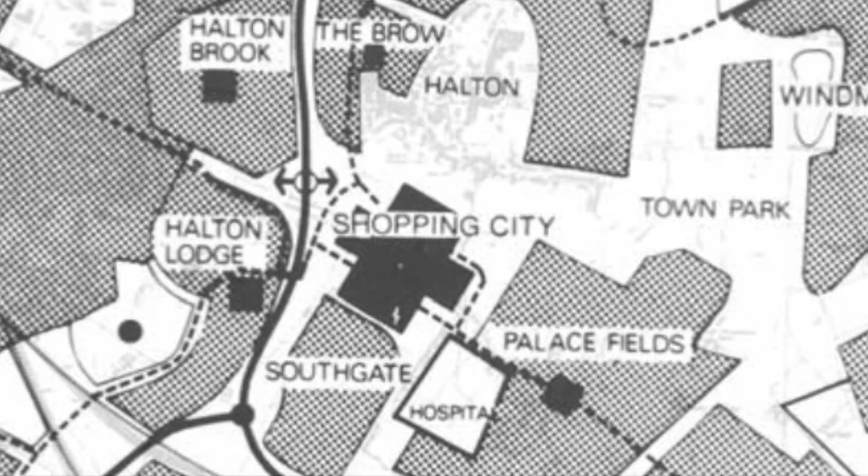Runcorn Shopping City was the solution to the need of establishing a complete town centre for Runcorn's new town. The resulting complex of buildings was the result of months and months of planning, designing and engineering. This continuous process lasted right into the middle of its construction and would accumulate a number of other agencies and investors to make it a reality.

If you haven't watched part 1 of this series, it would be useful to understand the underlying situation of Runcorn Newtown from 1964 when it was first designated to 1968 when construction was underway. In this video, we'll look at the very long, very sophisticated planning of Runcorn's shopping city.

Runcorn Development Corporation's town centre team consisted of many disciplines and talented people who were incredibly forward-thinking, well-read and ambitious in their desire to not only meet requirements but attempt to provide a new world solution to make quality of life better using the most advanced technology and pioneering construction techniques of the day. Arthur Ling was the producer of Runcorn's master plan, but an entire team of people dedicated to the town centre are responsible for the design of Shopping City.

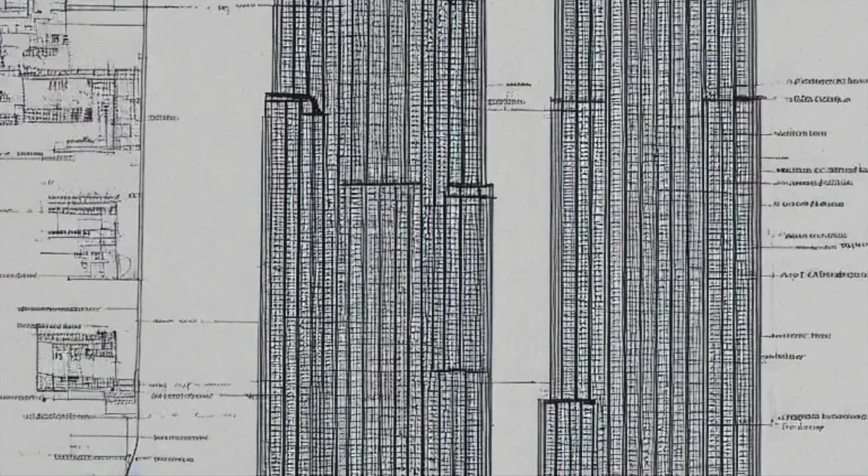Unlike famous architects like Le Corbusier, or famous buildings like the World Trade Center or the Empire State Building, there is no wealth of documentaries, publications, or even interviews with many of the people involved here. In fact, many were probably just government-appointed contractors and analysts who were assigned to this project and who moved on to the next job when it was all done.

Some exceptions are the key people who were involved, such as Fred Lloyd Roche, chief architect, later replaced by R.L.E. Harrison, the latter of whom was on a Canadian documentary looking back at Runcorn Newtown, its objectives and what people thought some years later, having lived in them. Another is David Gosling, Deputy Chief Architect, who was later replaced by Keith Smith, the former of which went on to produce a number of books on the design of retail systems and planning and was a scholar at the University of Sheffield, later of Cincinnati in the USA.

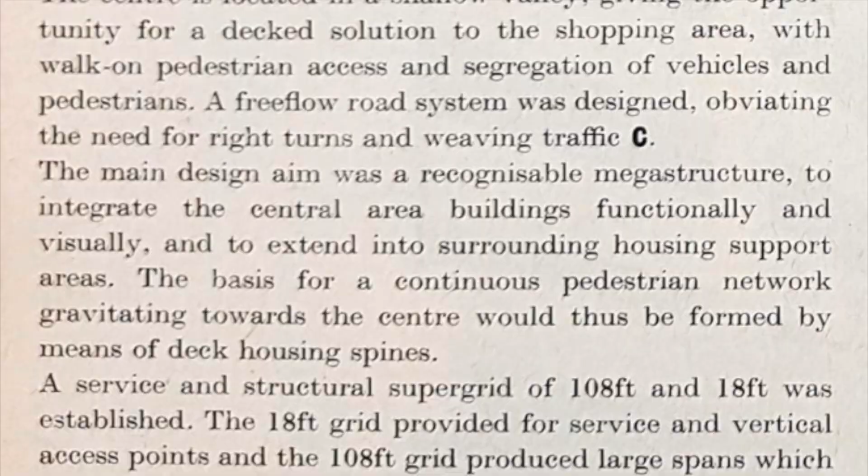Some of these key people were on record and interviewed or sharing their findings from their careers as architects, planners and artists with the world. This is where much of the insight in this video comes from. There are many others who I cannot find information on, but as I cannot credit them, their legacy will hopefully be honoured as you learn more about the end result of what they worked on at Runcorn.

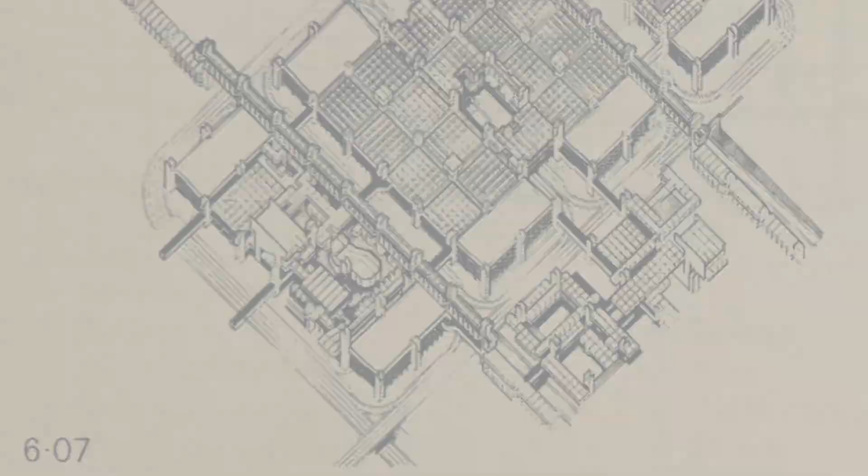When it came to drawing up the architectural plans, everything at Runcorn's new town centre was determined by solving a technical problem. Every design decision must solve a problem. So what were the problems and solutions that were found?

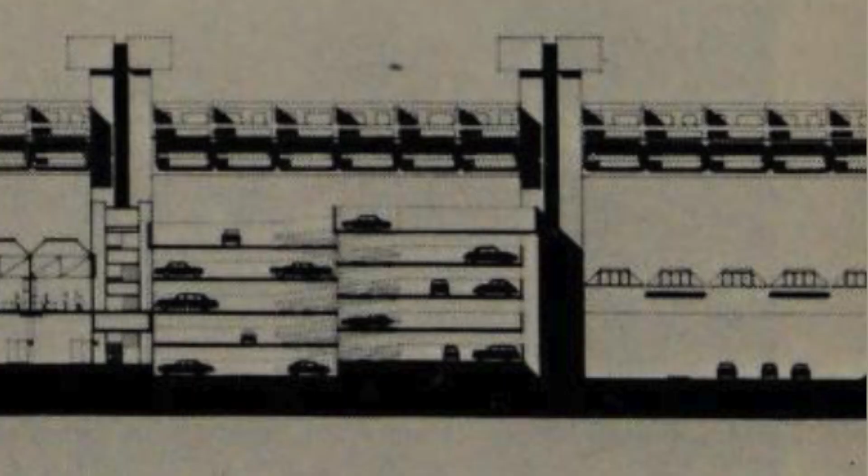Segregation of traffic. Early models concluded that pedestrians, public transport, cars and service vehicles would be vertically separated, that is to say on different physical levels. Each solution for these would need to integrate practically. Walking routes provided pedestrians easy, equal access alongside easy, free-flowing private car routes on the expressway, and a separate exclusive road network just for buses covering public transport in the form of the busway.

Convenience and quality of life. This is what ultimately led to the decision to put everything under one roof.

Integration of multiple priorities. To be well connected to other parts of the town and not all be centred around shopping, but also high density housing, offices, leisure, social and welfare buildings.

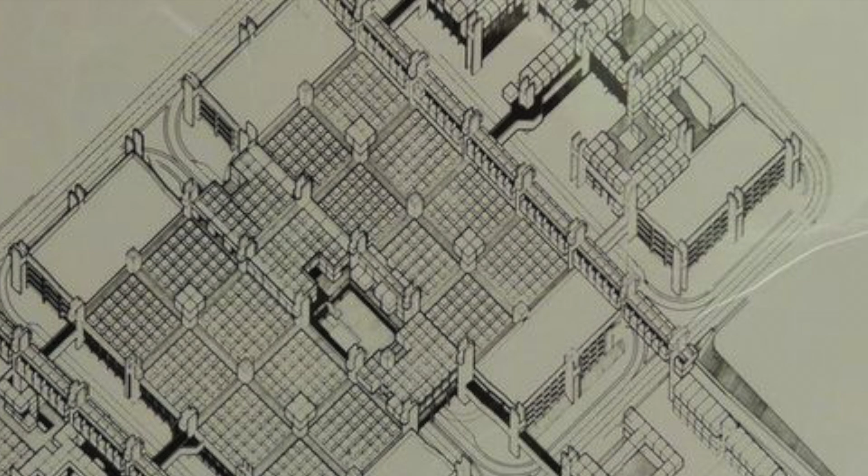To accommodate the upcoming boom in car ownership and eliminate the problems of nearby, decent quality parking for whatever your reason to visit the town centre. 4,500 spaces were ultimately provided, of an 85-15 modal split between people arriving by car and only 15% by other means. 8 multi-storey car parks were planned initially to be built across multiple phases. Of course, we only ever actually got 4 with a capacity of 2,400 spaces.

The ability to expand with future needs, trends, societal demands that could not be envisaged at the time. This was achieved in theory with the final land zoning decisions of the complex, notably Southern Loop site, which was to be the last, much later finished phase.

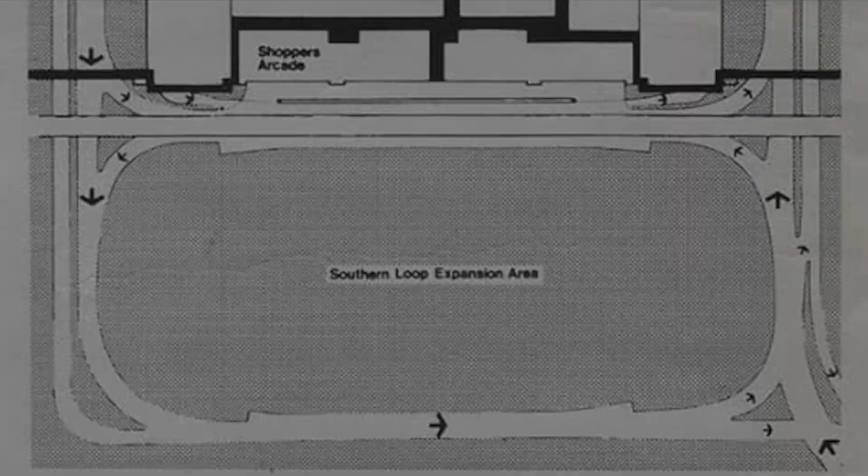Putting everything on a single raised deck level was a key decision and worked well with the valley site's topography. It also played well in keeping the shopping level in line with the adjoining neighbourhoods, allowing pedestrians to conveniently walk across without going down or uphill in most cases.

The Development Corporation consulted Drivers Jones and Company as shopping consultants, as well as the Multiple Shops Federation in refining their concepts around how to use the interior space. Why was Runcorn's shopping city so big?

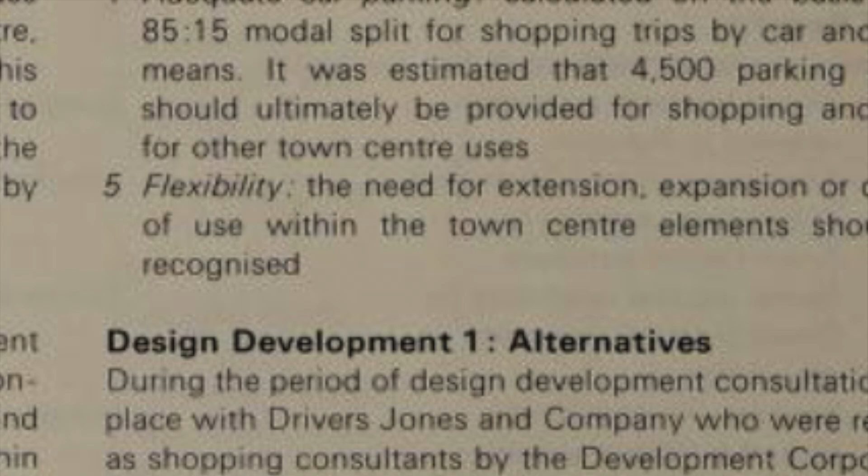For a small town, even of the projected 100,000 people, the amount of retail space can be considered excessive. In the 50s and 60s, motorways were rapidly being built up and down the UK. The planners reckoned that this and the impact it would have on society and how far people were willing to travel more regularly drastically increased any precedent for a catchment area.

People as far as Liverpool and Chester were thought not only to have easy commutes to Runcorn, but could and would choose to travel there regularly just for shopping. Increased mobility and changed living standards were set to ensure that building such a large retail centre would not be in vain.

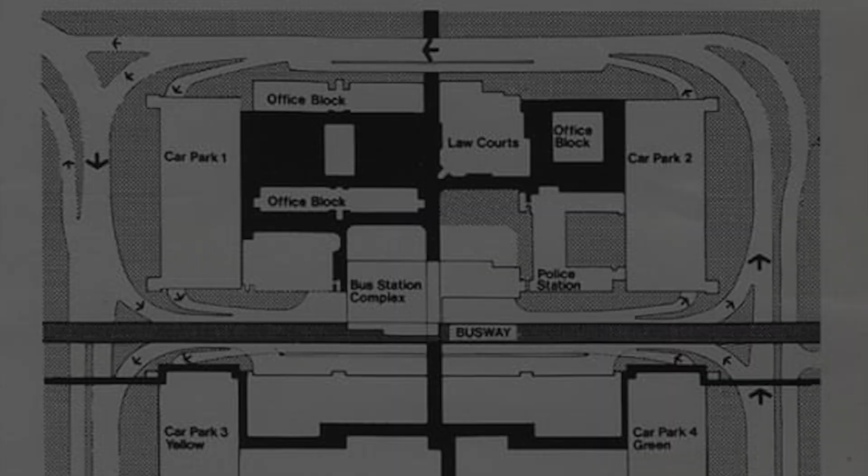On the ground level of the valley site, there were four large loops which circled around the town centre. These ran north-south and carried the major traffic movements. This was based off Kenzo Tange's Tokyo Bay project, racetrack-like in its design.

Unlike today, there were no roundabouts or adjoining sites. Driving to the shopping city was a smooth, seamless, congestion-free experience right off the fast-moving expressway network of the town. The road network nicely broke up the site's plan.

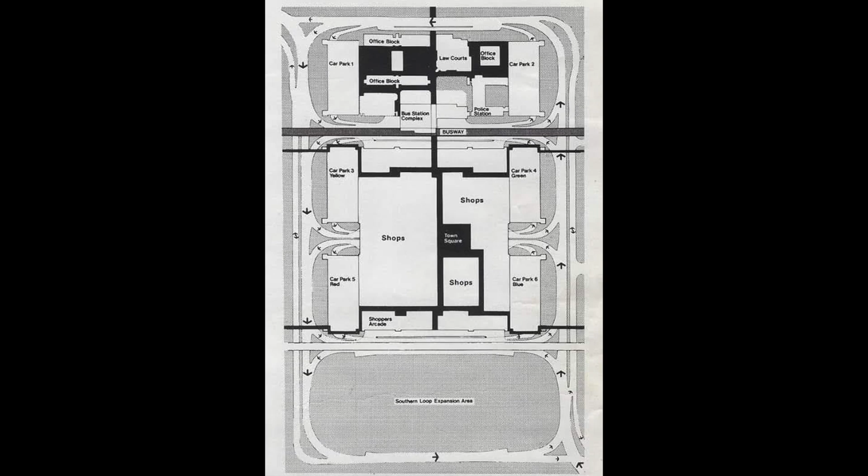The North Loop was where the civic amenities, offices, and regional bus station would be located. The two central loops were home to the shopping centre core, and the Southern Loop was zoned for future development of a leisure complex with entertainment amenities.

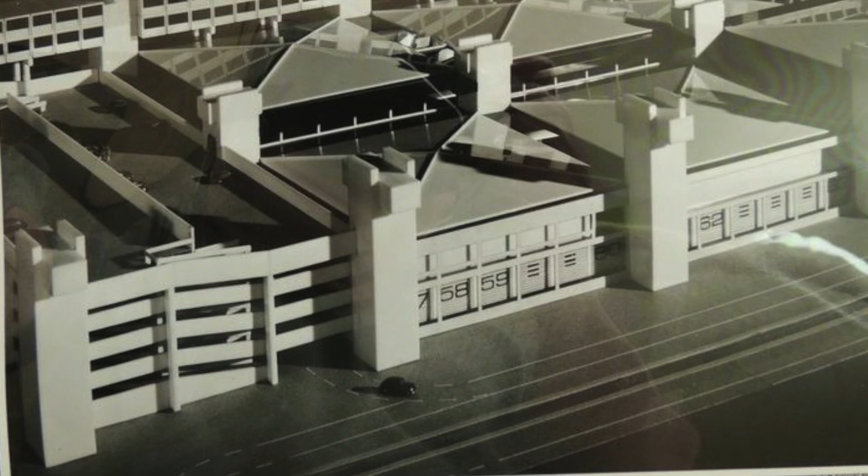A megastructure was the clear solution to the technical challenges the planners wished to overcome, but how would the structure be composed? A number of models and ideas were considered, including one with car parking entirely below the sales and storage levels of the town centre, but these were rejected due to the structural requirements for a multi-storey car park, and the structural requirements for large loading bays and the movement of stock between bay and shop floor.

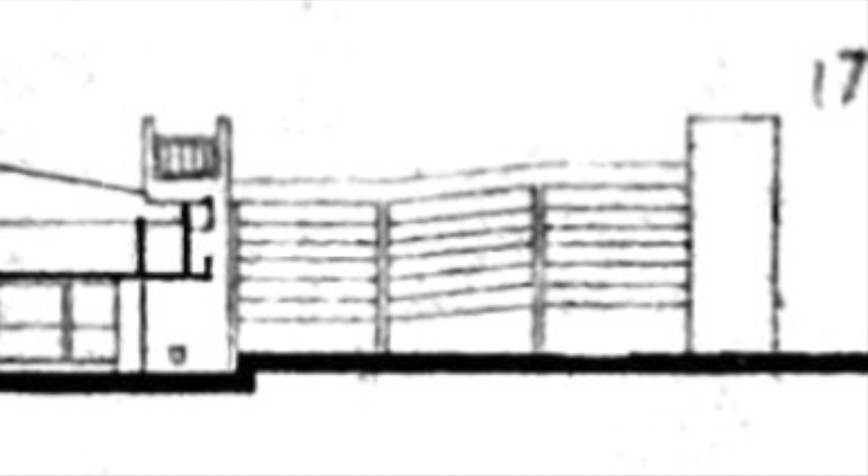For reasons of flexibility and structural economy, car parking was decided to be located on separate multi-storey car park structures which flanked the shopping centre area. The ground floor underneath the shops would be the bay loading and storage area.

Vehicular circulation through the four loops would be one-way and free-flowing. This enabled fast entry and exit for motor cars and loading vehicles. Four multi-storey car parks with four split levels were decided on, giving no more than two flights of stairs from any given parking space to the mall entrances.

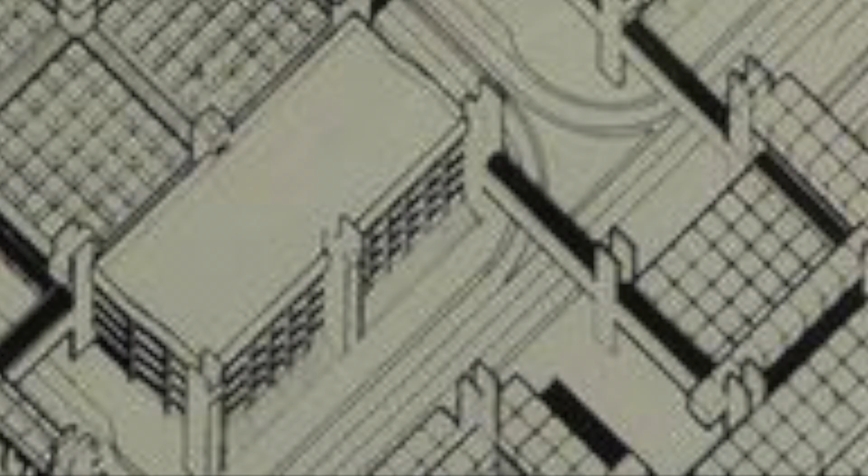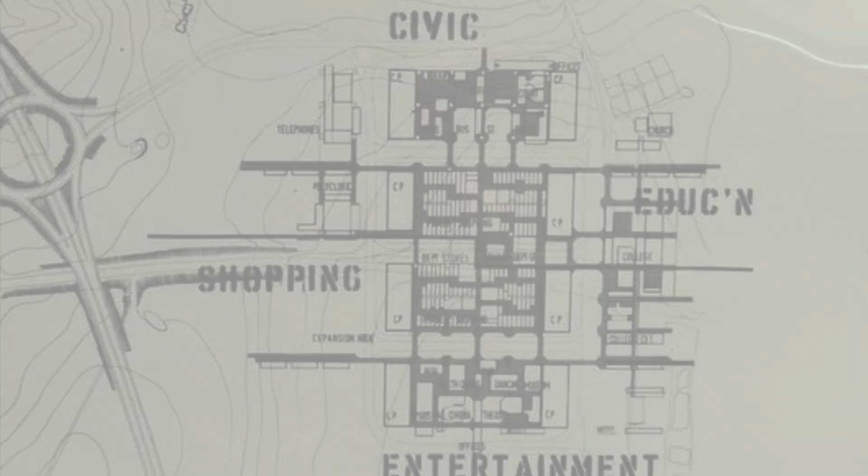The mall layout itself revolved around a central corridor running from north to south, connecting the Southern Loop's entertainment complex with government and office space to the north. Cross malls were how the car park entrances would lead to the main mall. Overdeck housing was still on the table at this stage, over the north and south edges of the shopping centre, which were to act as yet another passageway across the town centre.

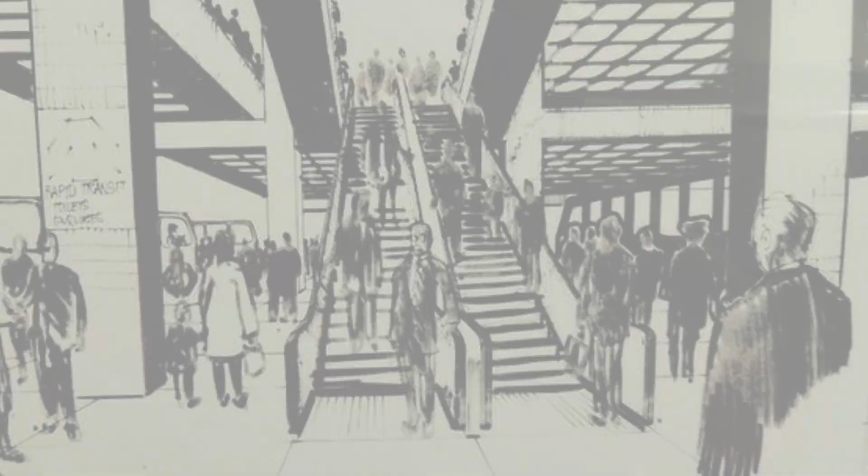The rapid transit network, later to be known as the busway, was now planned to run as a viaduct around the centre at deck level, with direct access to the centre. A north and south stop were planned, with the north to be completed in phase one.

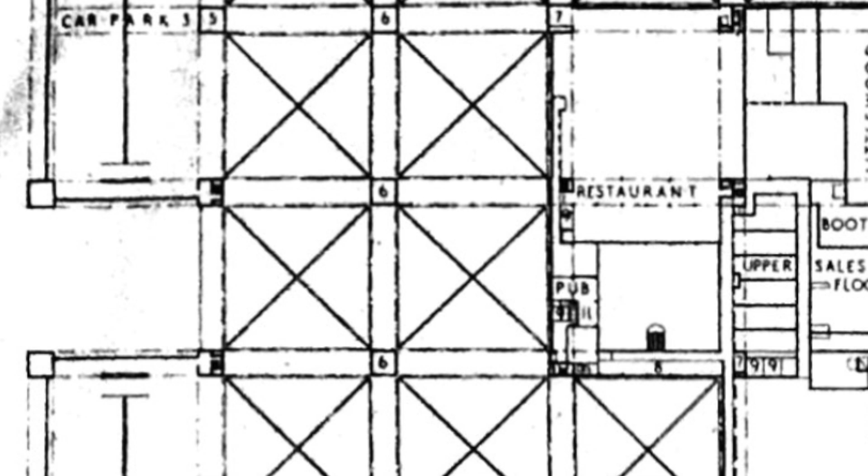Here's where we get into the concrete details of the megastructure itself. A 108 feet supergrid of squares, joined by an intertwined network of smaller squares at 18 feet each, provided a large span of steel towers known as service towers, which held up the reinforced concrete flooring and lightweight steel truss roof pyramids. These towers acted as vertical access points between levels and were key to achieving flexibility goals.

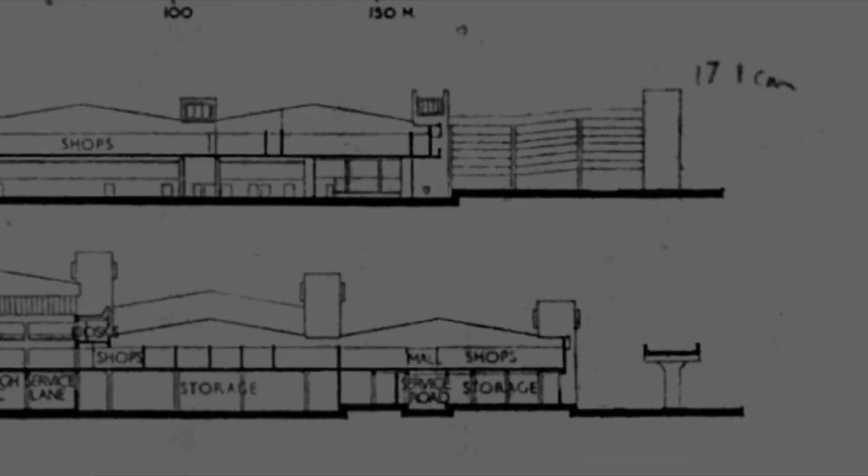Initially, the roof structure was to be a series of lightweight aluminium space frames, allowing light consistently into the whole of the centre. The decision to go 108 feet on the span of the grid was, as previously mentioned, to support the maximum size possible for the Vierendeel girders for the floating overdeck housing that was still at this point being considered. This size was also the maximum for fire compartmentation.

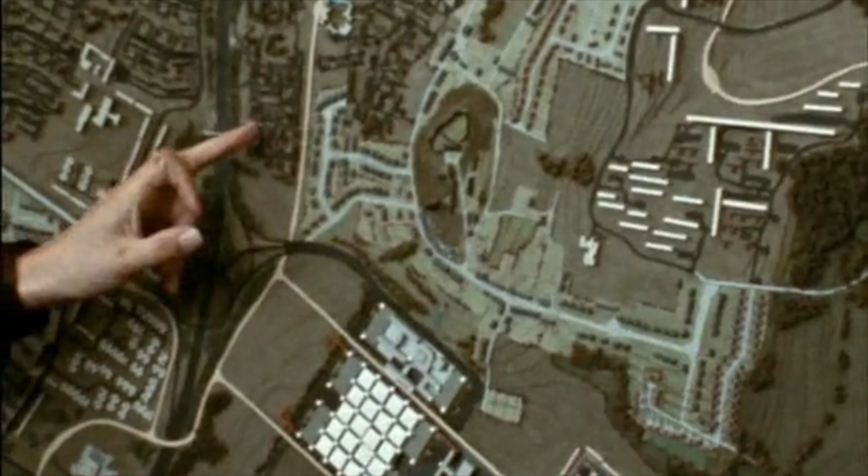The new town was a government project, and providing for human needs in an economical way was key to justifying the spend of public money. Whilst it was an ambitious feat to try and solve much bigger problems for urban planning, it could be argued that the extent to which these public sector appointed architects and engineers were putting into what was effectively a shopping centre site for private companies to profit on is open to criticism on whether or not they were making good use of the public's tax money.

When approval was sought from the Ministry of Housing and Local Government in 1967, approval of the plan for the new town centre, as it was presented, was completely dependent on finding private funding for a substantial portion.

The Development Corporation was firm on its belief that the most effective way to recover the public's money invested by the government was through the commercial sector, as opposed to over-depending on housing rent or industry. It submitted a formal application in March 1967 for approval of the project, with an estimate that the total capital cost would be returned by year 22, 1989.

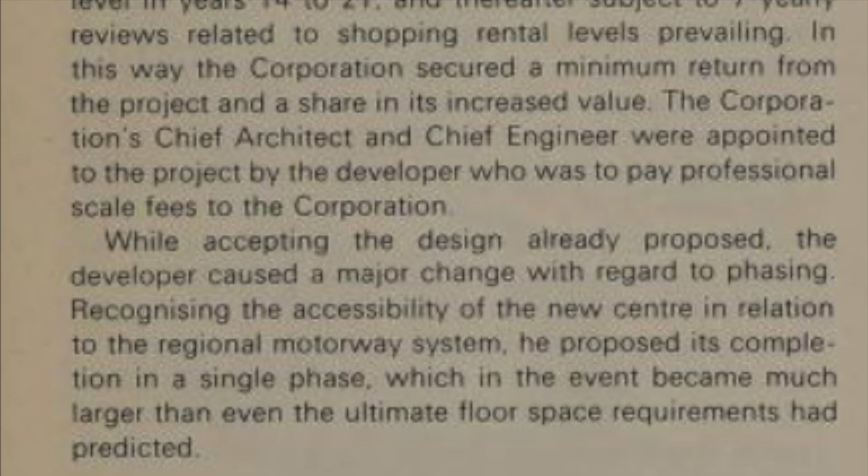The developer for the project was Grosvenor, the landowner for much of the land used in the new town. Its experience in managing diverse and large land holdings, combined with substantial financial prowess to put into the project, was a necessary and powerful combination in making the Development Corporation's vision a reality.

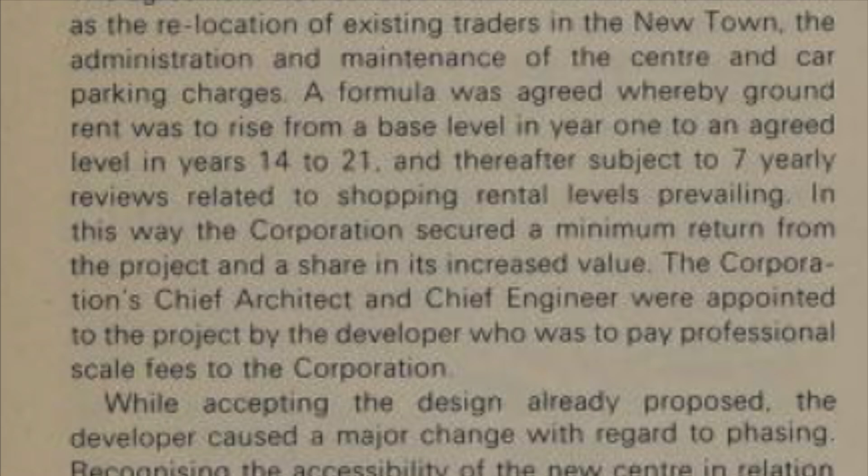Agreement came in the form of a 125-year site lease, and construction was undertaken of the complete shopping centre and car park buildings. The Development Corporation carried out the infrastructure and site works, as well as the relocation of existing traders in the new town, administration and maintenance of the centre, and car parking charges.

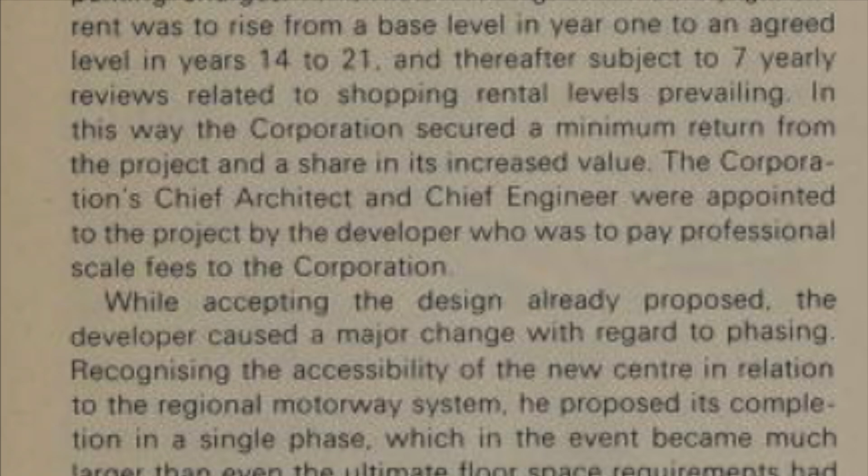A formula was devised to recover costs. Ground rent was to rise from a base level in year 1 to an agreed level in years 14 to 21, subject to 7 yearly reviews relating to shop rental levels. This was thought to guarantee the corporation a minimum return from the project and a share in what was hoped to be increased value over time.

The Development Corporation's chief architect and chief engineer were appointed to the project by Grosvenor, who were to pay professional scale fees to the Development Corporation. The whole project was now financially viable, with the business and financing taken care of thanks to Grosvenor taking on the project and providing substantial private funding. It was time to press on.

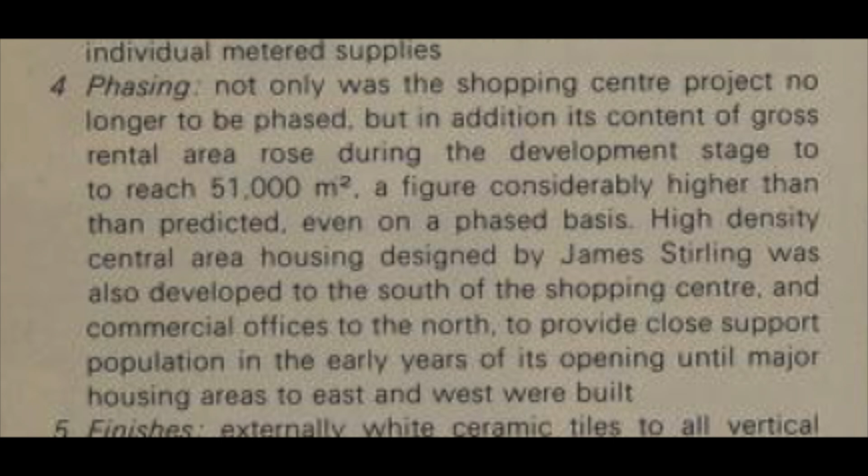Grosvenor accepted the corporation's current design plans, but had one major early change prior to construction: to abandon the idea of phased construction and go right ahead in building the complete shopping complex in one go. Working closely with Grosvenor's managers and consultant quantity surveyors, the Development Corporation's architects and engineers were penning the final plans to be constructed. A working party met weekly to discuss and draw up the intricate details for construction.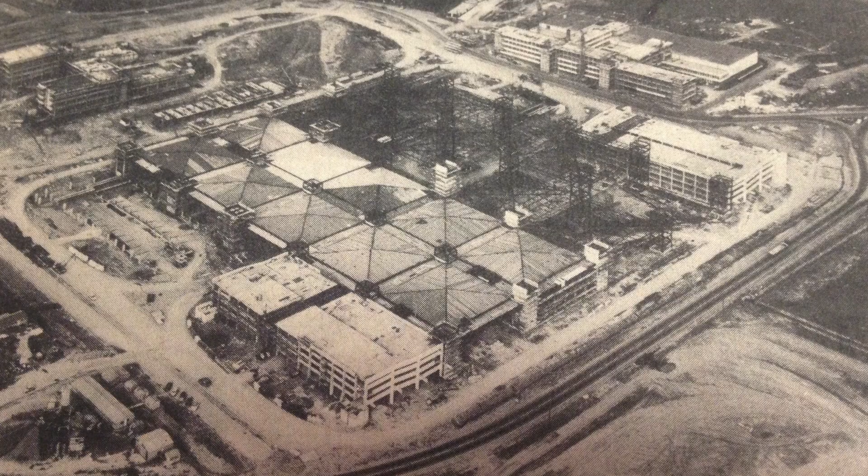Construction started in 1968. From these regular collaborative meetings, some significant changes occurred into construction, largely dictated by the developer. The service level or ground floor entrances, which previously only had an east-west entrance under the middle of the centre, were now also opened up to pass through the north and south elevations.

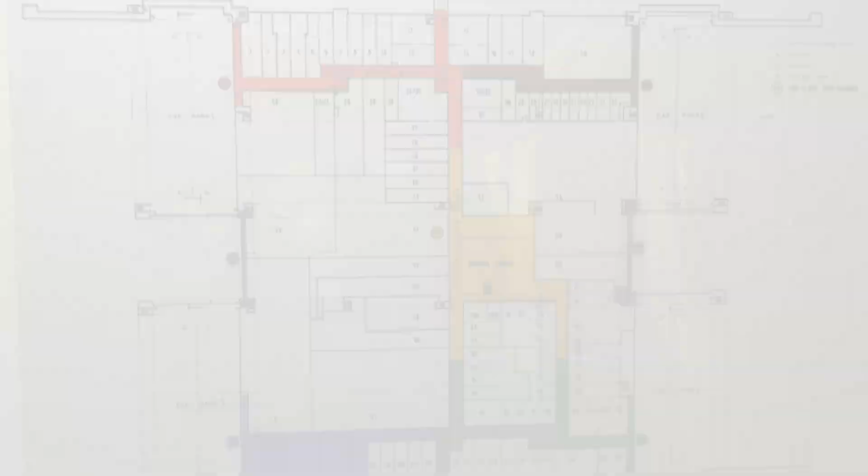The final mall layout was drastically changed. The more imaginative and unique layout the Development Corporation had intended was changed by Grosvenor. It was now more of a sideways H plan with two cross malls on the north and south leading to the car parks. Major supermarkets were now moved closer to car park entrances in order to make shopping trolley journeys shorter from till to trunk. Many more smaller shops were located close to the central square.

An upper level would be present around the central square, with service-based traders taking up the space. Traders would be given the option of expanding shop floor space by being encouraged to make use of a mezzanine level below the shopping deck.

The lightweight tubular space frame roof, which would provide a completely daylit shopping experience, was abandoned on cost grounds. This is probably the biggest change to the final centre. The square pyramid roof structures composed of intersecting steel trusses were introduced here as a compromise.

The district heating plant, located close by and shared with the adjoining Southgate estate, was to heat the centre with an opt-in plan available for shop traders via metered supplies.

Originally, the Development Corporation intended to use the same ceramic white tiles from the exterior on the interior of the centre, walls and floors. Grosvenor had changed this in favour of higher quality materials: off-white terrazzo flooring in 9 foot sections with brass joint strips, and 150mm white marble lined walls in between shop unit openings.

Ventilation of the covered centre came between the top of the wall edges, with the ceiling a 75mm deep vent pumping fresh air and heat into the centre. The ceiling was to be fully illuminated and suspended, formed of 600 by 600mm PVC profiled panel diffusers.

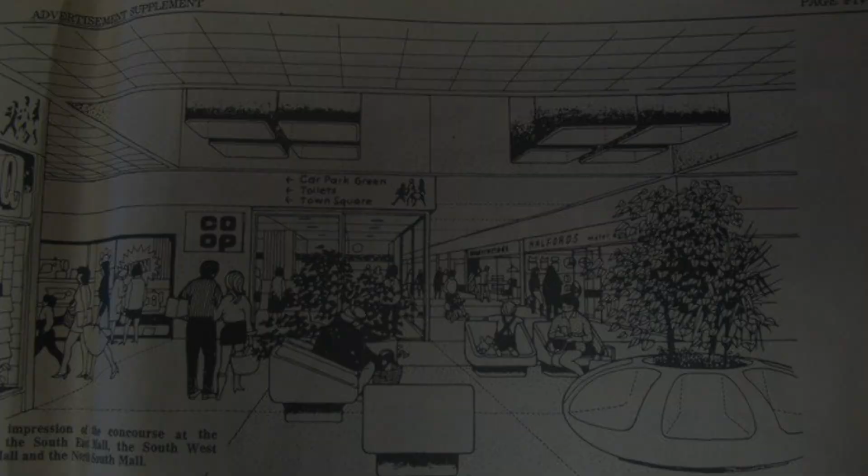Last minute changes were made between the developer and some key tenants with interest in occupying Shopping City. Many of the challenges of changing layouts last minute led to no real cost or time implications thanks to the utter flexibility of the supergrid structure. Some of the biggest national retailers were invested. It was full steam ahead towards construction. Runcorn's Halton Valley would never look the same again.

The primary contractor for Shopping City was John Laing. The sheer scale of the project would dictate that only one of the largest and most established construction firms in the UK at the time would be appointed.

The project was ultimately completed on time and within budget, and the construction company viewed the opportunity to boast about making history. It's interesting here that the term, not the name, Shopping City was used to describe somewhat of a new concept, insinuating that perhaps further shopping cities would be built elsewhere.

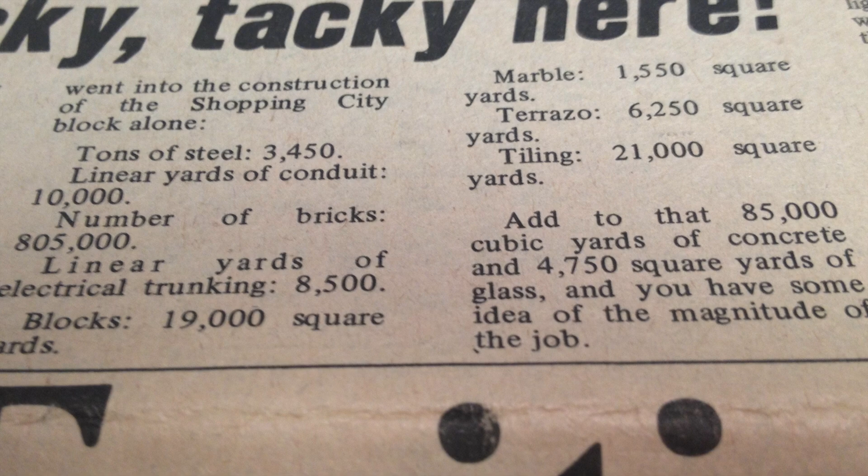The project had the following headline material orders: 85,000 cubic yards of concrete, almost 3,500 tons of steel, 10,000 linear yards of conduit, over 805,000 bricks, 8,500 linear yards of electrical trunking, 19,000 square yards of blocks, over 1,500 square yards of white marble, over 6,000 square yards of terrazzo flooring, 21,000 square yards of tiling, and nearly 5,000 square yards of glass. And yes, most of that glass probably was shop window glass and not the daylight filling kind.

Shopping City opened for trade on the 4th of November 1971. It would officially be opened by Queen Elizabeth II in May 1972.

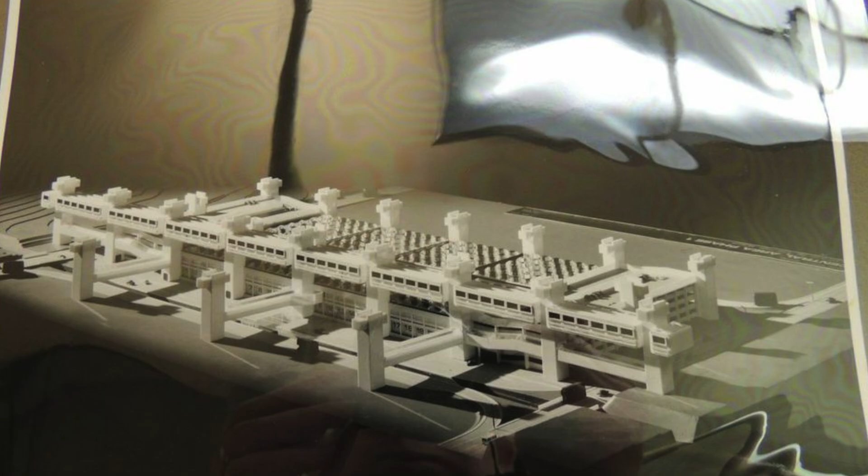We've looked at how Runcorn Development Corporation started investigating what the new town centre at Runcorn would look like, and how its ambitions to overcome much of the problems they saw in conventional towns took the form of the shopping city: an entire town centre under one roof. It produced Europe's largest indoor covered shopping mall. We saw how appointment of Grosvenor as a private developer gave the green light to the entire concept. Remarkably, the finished result on opening day was close to some of the earliest preliminary models.

We'll go on to explore the grand opening of the shopping city by royal visit and see it in its early years of trading. How did the public at the time respond to the space age new focal point of their town? What did the critics at the time think, and how did years of reality impact the original designers and architects' opinions on their grand concepts? Keep an eye out for the next part of this series.